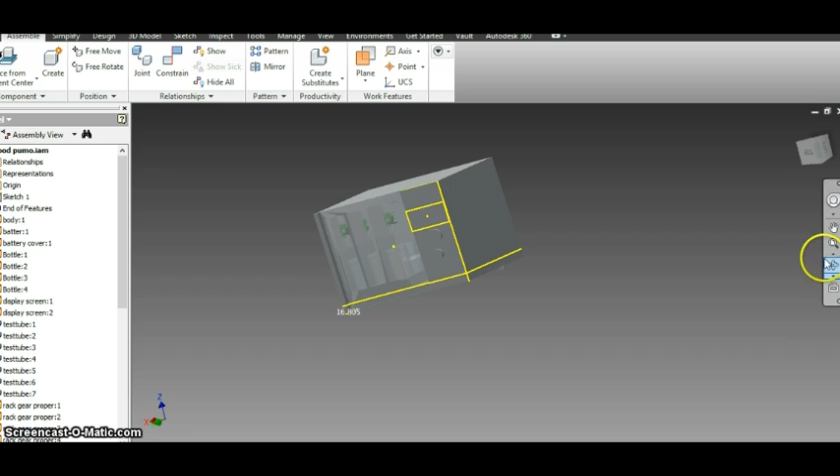This is the cross-curricular project I have created, based on a Cobas 6000 analyzer. My project was to create something for people with anemia, like pregnant ladies, so they can figure out their blood concentration levels at a given time instead of waiting a week or two for results. This is very useful, as they can get their blood tested and see right away what their levels are and how much they may require, if they need to take pills, yes or no.

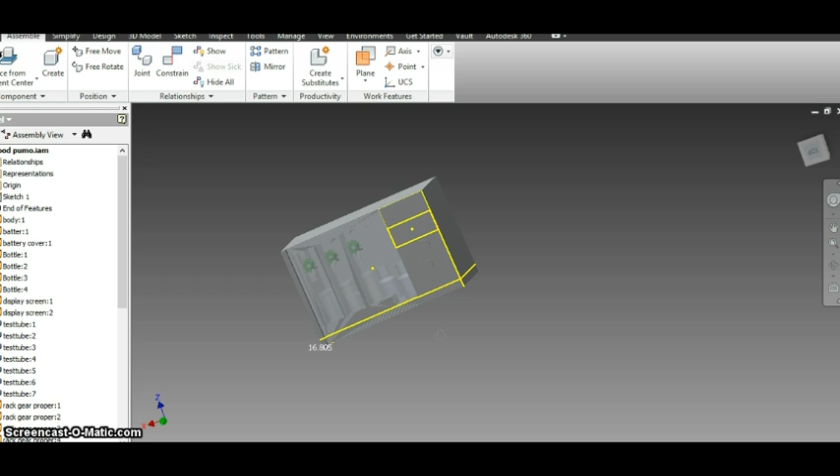So basically, the steps to test for hemoglobin: there are bottles inside with tons of different solutions. One is filled with citric acid, 200 millimoles per liter, thiourea 115 millimoles per liter, and a little bit of detergent. This is just a way to break apart the iron in our body.

The process is, iron is going to be broken apart into a transferrin-Fe complex, which is broken into apotransferrin Fe3+, and by using the ascorbate we can break it down to Fe2+, which can be further broken to Fe2+ ferrozine. This is used in a color complex I created that will measure the concentration of hemoglobin and display it on the screen.

Second order of business: after a couple of minutes, the machine will add 20 uL of sodium ascorbate, 150 millimoles per liter, and ferrozine, 6 millimoles per liter. This reaction will take about 10 minutes to occur.

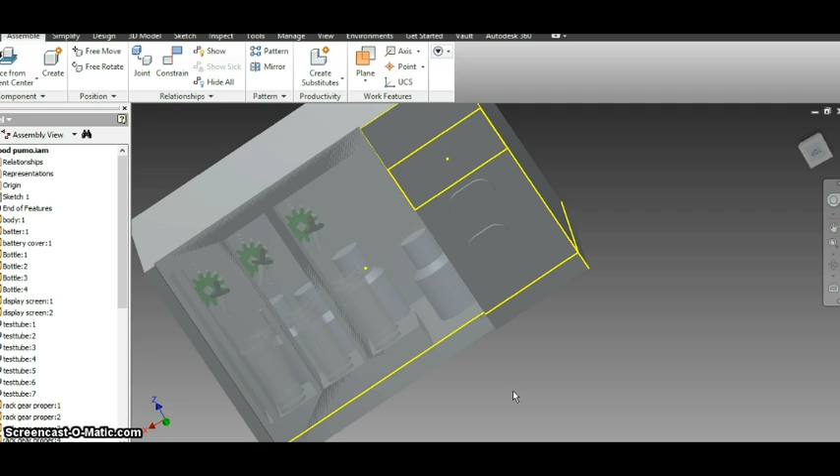After this reaction is done, a blood sample is taken by these pipettes, which deliver it using gears and rack gears to the other side, where there is a cuvette for testing the hemoglobin levels, which will then be displayed on this screen.

So you may be wondering, how do I get my blood? There are two ways. There's a needle that will later be attached to this that can insert into your veins, connected to a test tube, which will be in a bath.

Or you can prick yourself, since it only requires 8.5 uL of the patient's blood. That is approximately 0.0085 milliliters of blood, so I believe it's possible to prick yourself and take that blood.

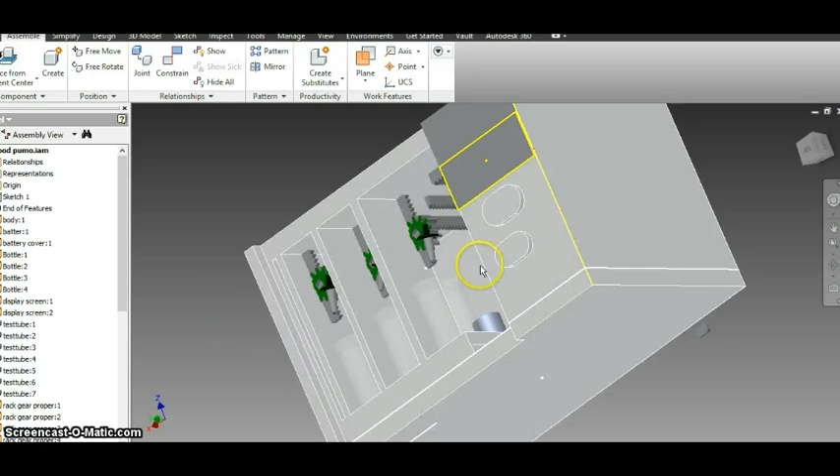This was designed in AutoCAD and has been perfected, as the gears move up and down, so will the pipettes. As the pipettes move, they can transport everything around. There were many parts to this: gears, cases, display screen, test tubes, and I will go through that in a while.

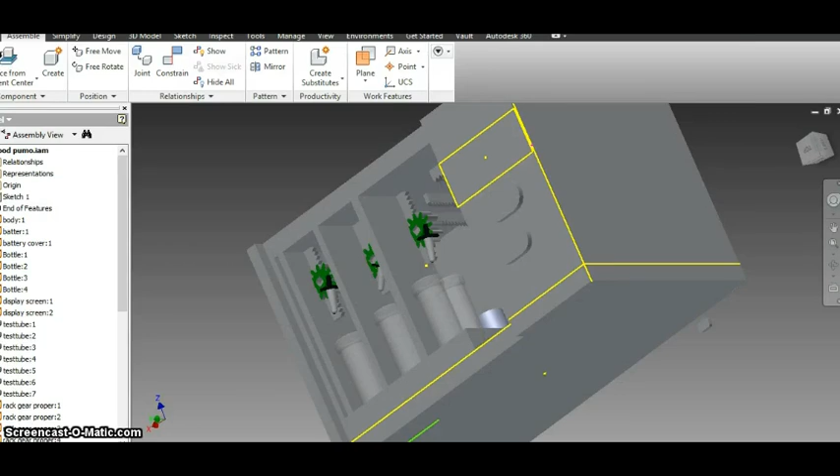This is a model of my rack gear. As it shows, these are all the teeth, and this will carry it around. This is a test tube, and this is how big it will be, how much it will carry, and how much it will produce.

These are my pipettes that will suck the blood or any type of solution that needs to be transported. Also, the first test tube, as you can see, will be in a 37 degree bath, and there are coils inside that will warm it up.

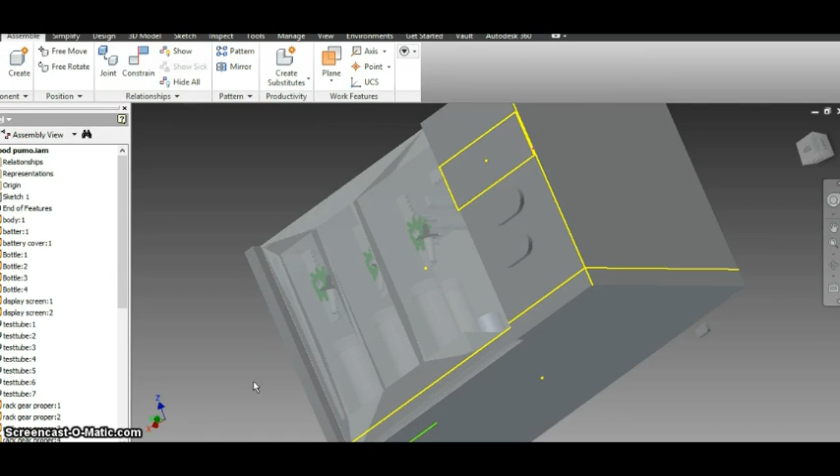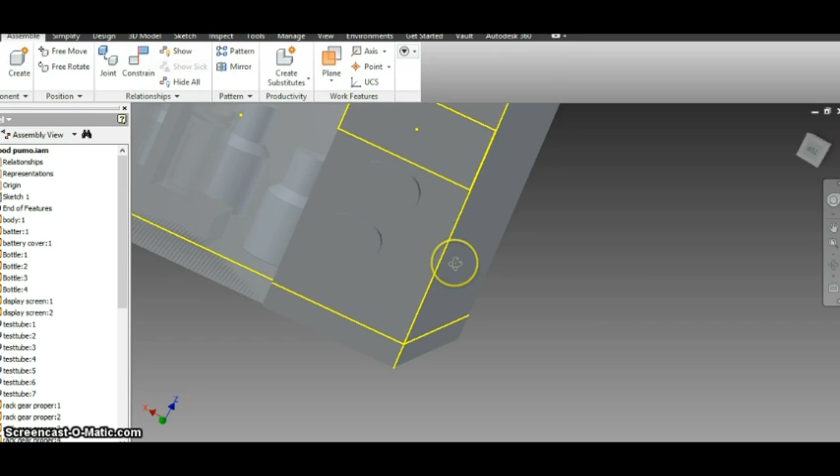On the back side, there is a battery pack right here, and this will heat anything that needs to be heated, so the coils will heat up, causing the water to heat, as this is a crucial step to converting iron to Fe3+.

What I need your help with is to figure out how I can further improve this machine. Is it really practical? And how can I make this more beneficial?